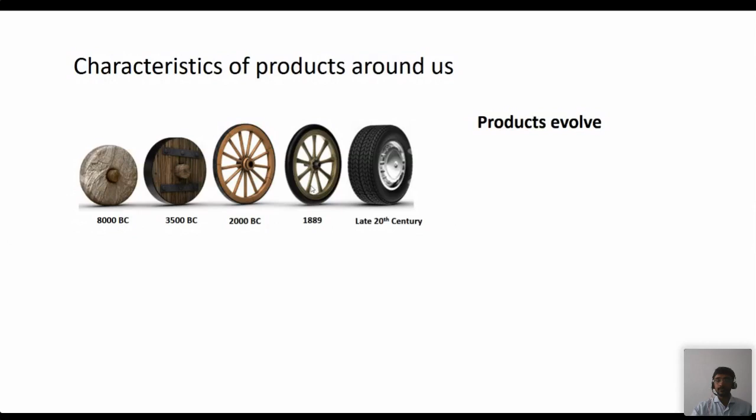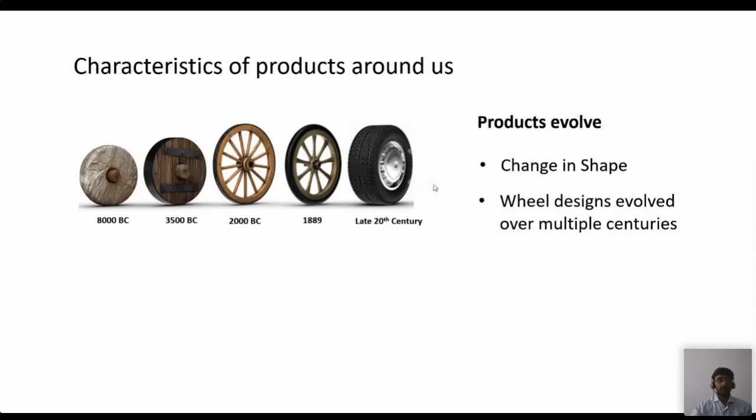And of course, the 20th century tires are much more sophisticated, with different kinds of rims and different kinds of performance tires and whatnot. So what we see is products evolve, they change shape from its initial configuration to another. The wheel designs evolved over multiple centuries, not over a few days or months or even few years.

On the contrast, I took another example of product evolution where we have cell phones. Cell phones started roughly around 1990s, and it has since then evolved a huge way now. I haven't put in some recent designs, but almost till 2015 we had a very strong evolution of cell phones itself.

On the one hand, a mechanical component like a wheel took more than 10,000 years to evolve into certain forms and achieve the form it has today, whereas a cell phone, which was a pretty recently invented piece of gadget, evolved quite fast. In the span of 20-25 years, it has evolved into multiple form factors and also in terms of functionality, with multiple functionalities added.

If we think of the initial cell phone or mobile phone, it was primarily for communication purpose, nothing more than that. And it evolved a bit to accommodate also text messages. That was itself an evolution of the function of the cell phone, which further evolved into touchscreen and smartphones.

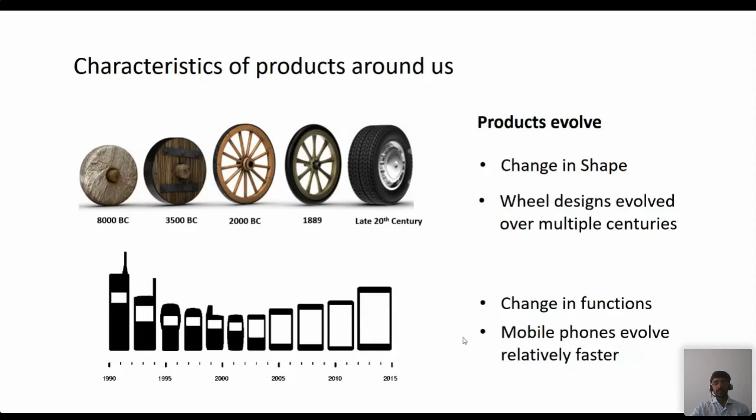So why do products evolve? This is a fundamental question we should ask ourselves. Why can't the product remain the way it is? Because the reason why the product exists is that it solves a problem for someone. And as long as it solves the problem, why does it need to evolve?

Well, it turns out evolution is part of the requirements. The requirements of what the particular product should do also evolve with time. People start changing their requirements, needs, or expectations from the product. People at the start of the product evolution cycle just think about its core functionality.

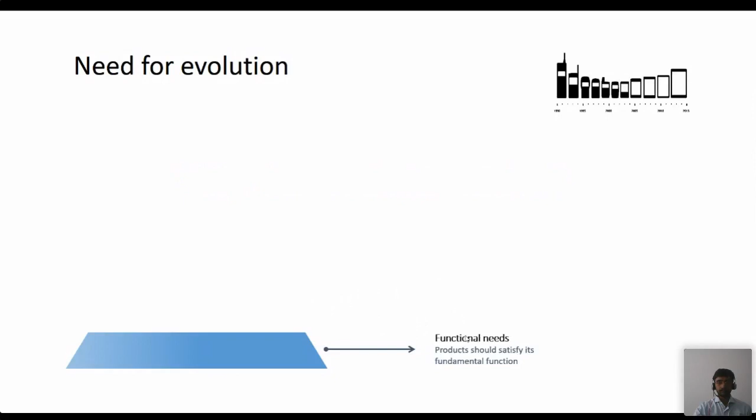For instance, in case of mobile phones, just talk to people. The next step, people say, well, now I can talk with people. Now how safe is it? How reliable is my phone? Can I take it everywhere? Is the voice secured enough between just two people? Or can someone else also hear this conversation? Such kinds of requirements pop in next, so the product has to evolve to satisfy these needs also.

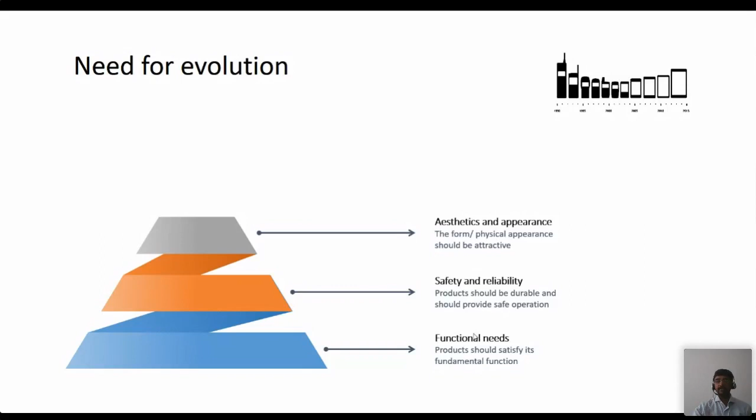It evolves further. People think of aesthetics now. So it's not just about the function, but also the look and feel of the product. How good is my product? Am I happy with it? Am I proud to have owned this product? Such kinds of attributes come next.

And last but not least, the performance, not just the core functionality. People start looking for value additions like a camera in a cell phone, or the possibility to transfer data by a certain technology, or the wireless technology supported by the device, the speed at which the device can process stuff. I want to play games, I want to do virtual reality stuff. So is my device capable enough, or performant enough for that? Such requirements also pop in, and all these requirements step by step push the product to evolve and reach the stage we see here.

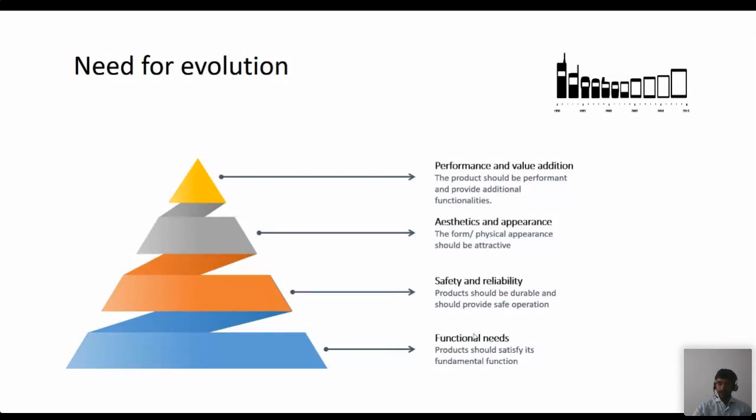But why do certain products evolve faster than others? Cell phones evolved in a span of 2 to 3 decades, whereas a wheel had to wait 10,000 years to get into the more or less complete form we see today.

To understand why, we have to look into the design process itself. How was the wheel designed, who designed it, or how the design itself evolved as a process. In early days, in case of the wheel, the evolution was more or less a natural evolution process. Someone came up with an idea someday and made a form, and it stayed like that for years or centuries together, till someone else came up with a different idea saying, 'I will make these modifications and now I can use it for such and such function.'

So these sporadic ideas here and there, which popped up over years, is what made the product evolve. There was no real standard process or procedure or design schema for the product to evolve. This made product evolution really, really slow - it was more or less an accident.

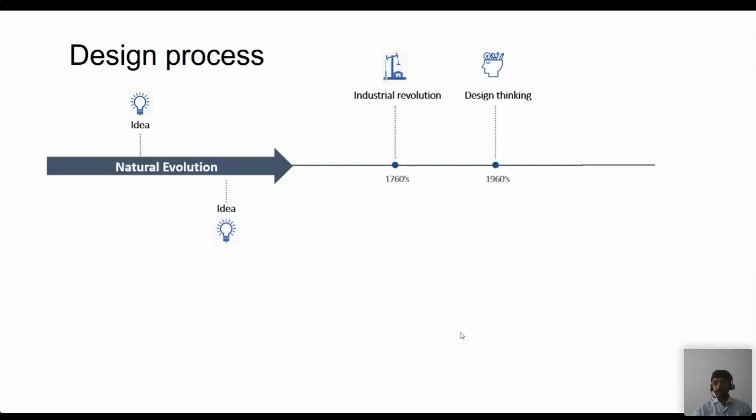This made huge leaps in terms of new designs and more robust designs, because now anybody with an idea has a structure to work on, and they can push or validate their product designs by sticking to this design process, which eventually evolved and took the form we call the conventional design process today.

Once a detailed design is there, people start creating prototypes, mock-ups, proof of concepts, and these prototypes are tested. The successful prototypes move forward, while the failed prototypes go back to the drawing table—they are redesigned, reworked, new prototypes are born, and then tested again.

This process continues until a satisfactory product satisfying the shape constraints and the function it has to satisfy is achieved, and then it's released. Of course, even after release, based on inputs from customers or users, the cycle repeats again, starting from concept, detailed design, prototype, and testing.

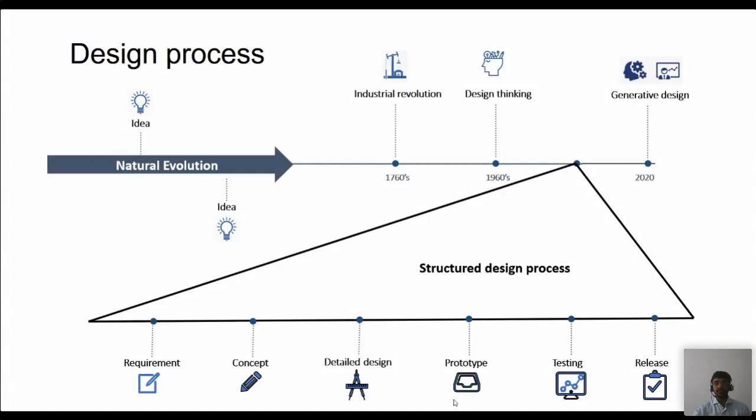Of course, in 2020, we are no longer adhering ourselves to these structured or conventional design processes. Rather, we are thinking about generative design—I'll talk about it in a later slide. We won't go into detail now, but it's a completely different paradigm, the way in which the design itself orchestrates itself.

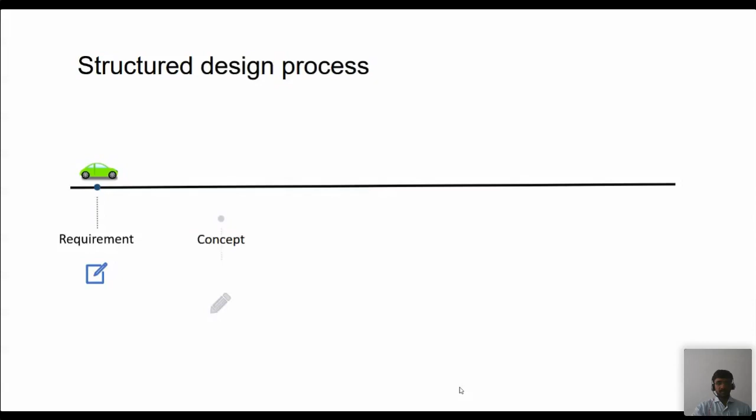A structured design process would start, as I said, from a requirement stage, then move to a concept stage. A concept stage is when people are not looking for real details—they just know roughly: okay, this is my function, this is my space constraint, and what should it do?

For instance, let's say a car. How do I define the function of a car? It has to transport people from one place to another. There's no form requirement as such. People might say, well, I need to transport 4 people at a time, and to drive the car it should be intuitive enough—it shouldn't be like driving an aircraft or something, it shouldn't be so complicated, and safety should be ensured.

And in driving, there should be reliability—that if I want to travel from place A to place B at any given point, I should be able to do it without having to think whether the device would work today or not. These are very fundamental functions people have in mind at the early concept stage of the product—a very early stage of the design process.

In a detailed design process, you can't just work with concepts—you have to put in very detailed designs which actually work. This is when people start thinking.

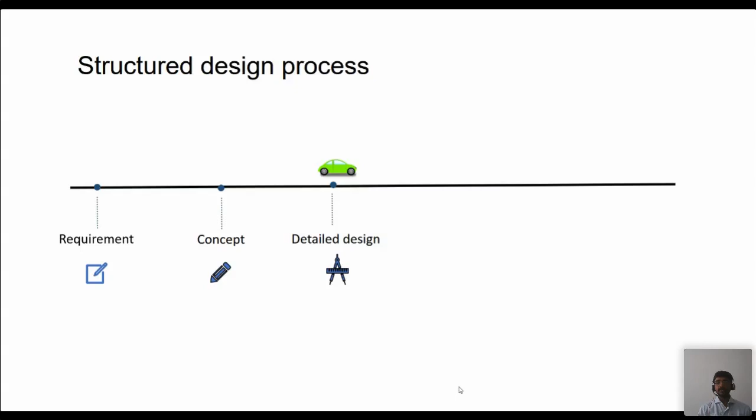Moving further, now comes the fun part: making prototypes. So you have the detailed design on paper, or on your computer. Now you want to make prototypes, so you go into the real world. You make mock-ups—these mock-ups may not have the real material, or may not be used by real customers. Rather, it's just a proof of concept to see which of the detailed designs actually work and which fail.

This is an interesting step, because moving from an on-paper design to a prototype is not a trivial task. At the prototype stage, you'd have very limited resources in terms of materials and manufacturing facilities, because the product itself is not proven. Without a proven product, nobody would invest in a manufacturing facility. So basically, people try to find materials and resources as they find fit, and try to create a proof of concept.

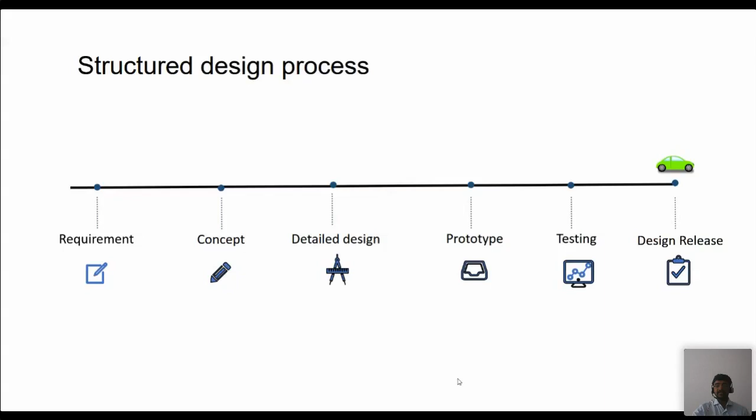Then finally comes the design release phase. That's the phase where your product sees the real world, and gets tested by real users.

In the product design process, we can split it into two parts. One, the concept design stage, is more to do with the form of the product - how it looks, the shape of the product, how the space of the product is, and so on - which is mostly done in a conventional design process using design drawings.

Most engineering students, irrespective of their department or field of specialization, would have taken this course, engineering drawing. That's pretty much what people used to do, at least in a conventional design process - take a piece of paper, use pencils with complicated compass arrangements to come up with these designs.

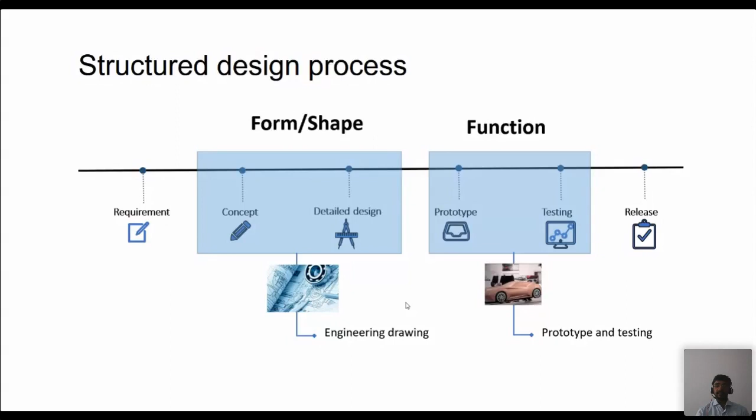Then the function part, where prototypes are built with materials, and also the testing - you have to design the tests, and also put your prototype to test. So on a very fundamental level, we can categorize the design process into two main aspects: creating the shape or form of the product, and designing the function of the product.

With the advent of computers, this cumbersome process of using engineering drawing - all of us know how difficult it is to get the lines correct, to get the measurements correct, and to imagine a 3D object in 2D. I'm pretty sure not all of us got 100 out of 100, or full marks, in engineering drawing. All of us are reasonably good engineers, but still we do make mistakes.

We make mistakes on very simple solids like a prism, or very simple primitive solid shapes, because it's not very intuitive, or it's a bit of a difficult task to imagine a 3D object and its 2D projections in different planes, and representing them in engineering drawing.

Because of the inherent nature of this technique, there are a lot of human errors involved, and this could lead to wrong products being designed, and also a lot of frustration because you have to redesign the product and don't realize it in the early concept stage, rather much later.

A concept designer would have something in his mind, but a detailed designer would understand it in a different way. A prototype engineer or a test engineer would understand it in a completely different way. So to align all these people together was very difficult.

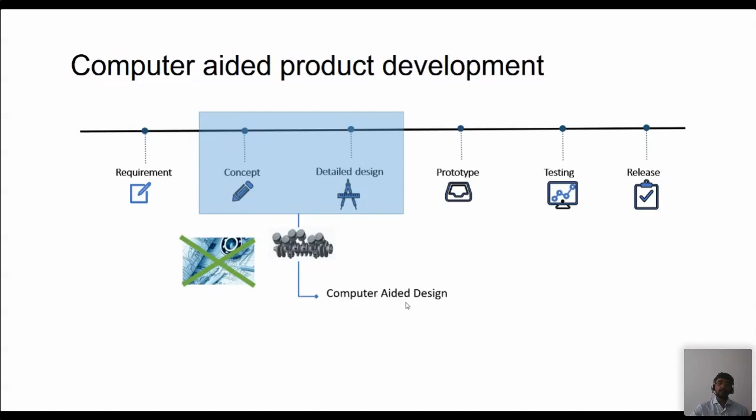A similar thing also applies to prototype and testing, because prototypes are a tricky business. We don't get the manufacturing facility upfront, so we have to work with the material and resource we have at that given point in time. So it's a very hard and sometimes very costly process. Imagine a complete car, or even an aircraft.

If you were to do a prototype of a complete aircraft and test it, first you have to design the test which is safe enough without harming people involved. Even if you manage to do that, if the product fails, imagine the amount of cost incurred in the failed concept. For such a complicated system like an aircraft, or even a complete high-speed train, it takes so many iterations, and each prototype would cost millions. This would literally make the complete product non-viable to bring into market.

To avoid such problems, computer aided technology revolutionized the whole process. We have something called computer aided engineering, or I call it engineering simulation, because engineering can be many more things than just engineering simulation. So the general terminology is computer aided engineering - CAD and CAE, we call it. These two digitalization technologies of the design process completely changed how we think about product design.

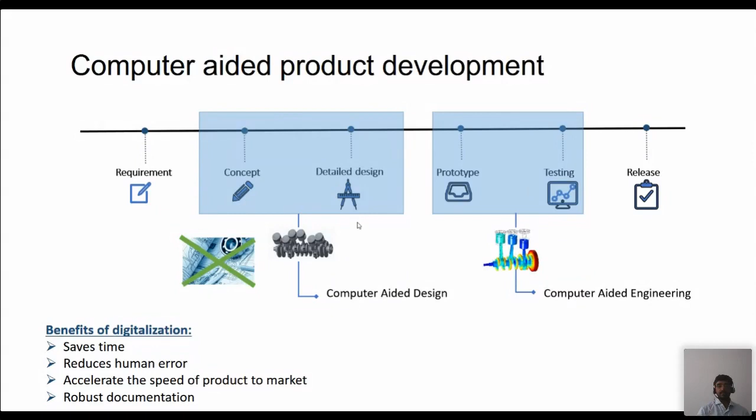A typical engineering simulation - now I move into the second part of my presentation, where I dive a bit deeper into engineering simulation itself. Engineering simulation is a process of predicting how a particular product would perform or function in reality without having to really model it in real life, like making a prototype. You digitally model the component or complete product and simulate it based on the underlying physics principles involved in the design, and try to predict whether or not the product would be successful, and under what conditions, to get more insight into the product without getting our hands dirty. A typical engineering simulation process starts with the physical system, concept design in this case.

Then we build a detailed 3D model of it, or even a logical model sometimes would help. A logical model would be like a representation of a spring and a damper, for instance. You don't have to really model the detailed definition of springs and dampers, but you just have a notion of spring and damper - you logically represent these two aspects in simulation.

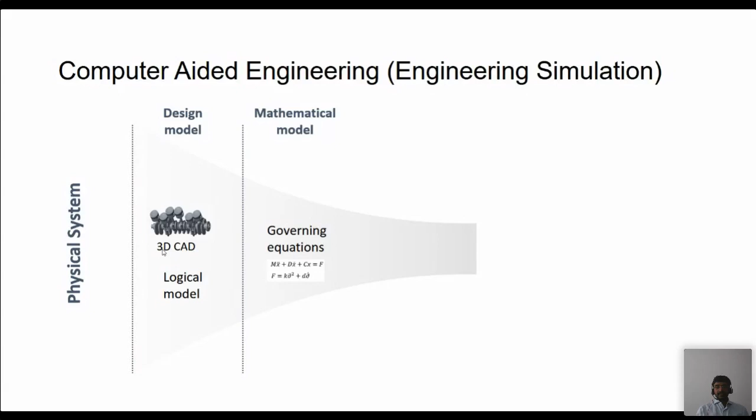The most important step is to derive the mathematical model, which describes the function of the system. A mathematical model is nothing but the governing equations or the physics which governs the functioning of this body. For instance, it could be simple physics from Newton's second law, or equations of motion, or it could be very complicated physics like fluid dynamics - flow of fluid within a tube - or complete weather prediction physics, or any kind of complicated physics. All these physics are at the end represented by a set of governing equations or mathematical equations. These equations describe the function of the object.

The next step would be to use these equations to solve the underlying physics problem. You would ideally have algorithms which work on these equations, and these algorithms are embedded in simulation softwares, and the equations are built into these softwares as well. So what you would ideally have in the real world is a CAD representation of the real system, and this would be given to the simulation software, and the simulation software, with whatever technique it uses, creates the fundamental physics equations which are relevant for this physical system, and these equations are solved using special algorithms tailor-made to solve them.

Once we solve the physics behind it, we have a reasonable prediction of how the system would behave. For an engine, for instance, whether it would work as we expect, whether it will provide sufficient power, whether it will be durable, whether the parts will break or not. Such predictions can be made with simulation by solving just the fundamental equations underlying and describing the physics.

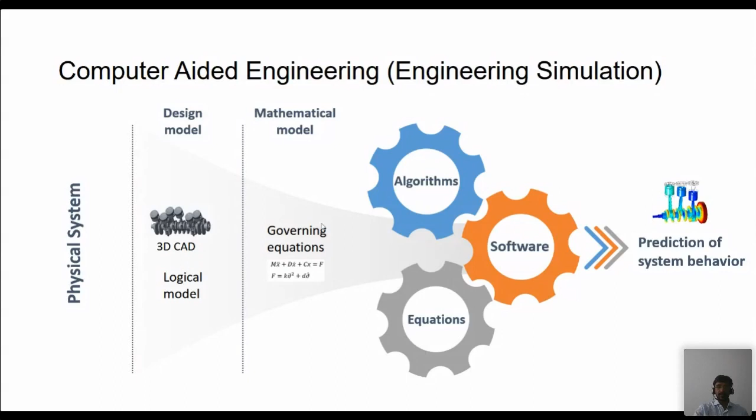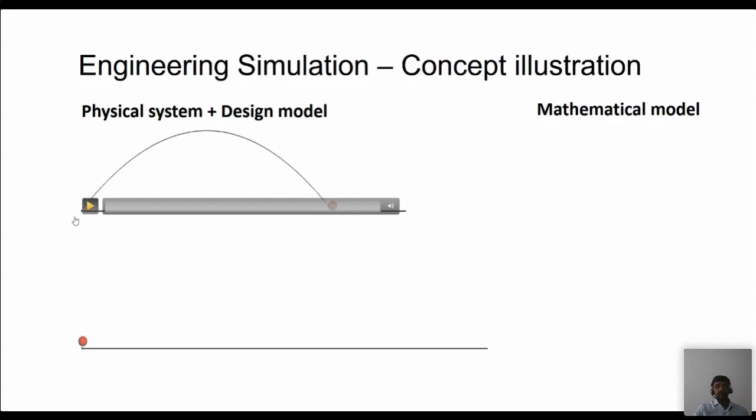So moving on, this is just a concept illustration of what I mean by simulation. You see this ball moving, just a ball with initial velocity, taking a trajectory under gravity and landing somewhere else. Most of us would have studied in school physics how to model this, how a mathematical model of it looks like. It's simple 2D equations of motion from fundamental Newtonian physics.

Let me make the problem a little more complicated now. So the ball doesn't just start and end at a point, but it bounces, and bounces again. There is a contact with the ground, and you can see it bounces, but after the bounce it doesn't have the same amount of energy for the next leap. So it travels less distance and also less height.

Interesting. So how do I capture this physics? I add a few more complications, or a little more sophistication - we can also call it detail - in terms of equations of motion or the mathematical model. So this mathematical model now describes this phenomena, not just a ball being thrown from one side and landing on the other side, but bouncing and doing something.

Let's make it even more interesting. Let's look at it in 3D. So how would it look like? Now we are not just dealing with two-dimensional space, but a three-dimensional space where the ball can move not only in the longitudinal direction, but also in the lateral direction. And also the ball can turn - it can rotate as it moves.

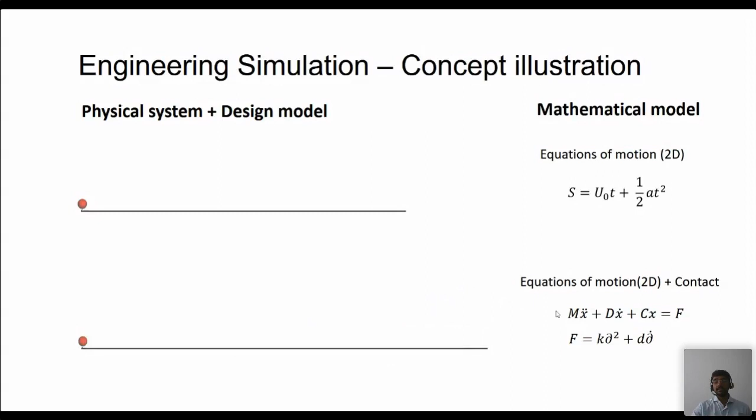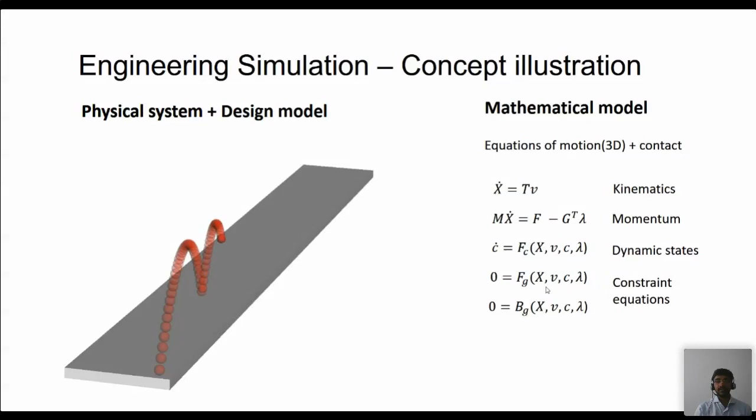But maybe my requirement is to see how much the ball bounces after the first contact or subsequent contact, or when the ball will stop. Then probably I should consider this level of detail. If I want to really consider how it's positioned not just in the longitudinal direction but also in the lateral direction, then I have to consider these equations.

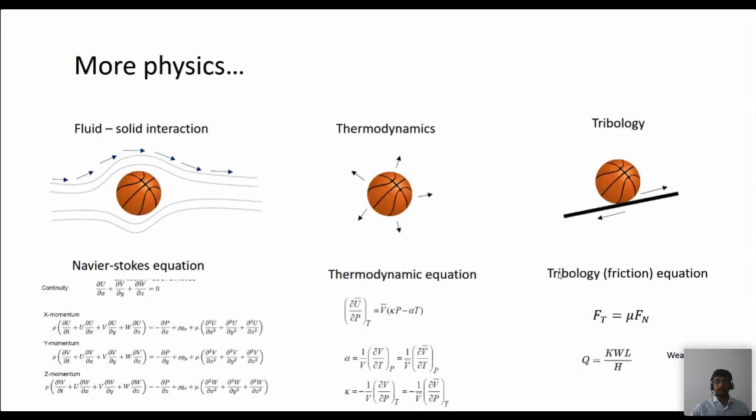But if I really want to go into detail of how the ball turns or twists from the perspective of the ball itself, rather than from the perspective of the global system, then I have to consider all these equations. So depending upon what the purpose is, we have different simulation domains.

So the underlying governing equations are classified into certain domains of simulation, which solve certain sets of equations. For instance, multi-body dynamics assumes the body, or any object, to be rigid and doesn't consider any elasticity. All we're interested in with multi-body dynamics is the overall system characteristics of the complete system. For instance, with this ball, I'm just interested in how the ball moves, not in how it deforms after its first contact or impact on the ground.

Structural simulation, on the other hand, says I'm interested in a little more. I can't assume the ball to be rigid; I want to really consider the flexibility of the ball. Then you have to consider a more detailed analysis, let's say finite element analysis. That's structural simulation, where the elasticity of the body is considered.

There are also other kinds of simulations. Electromagnetic simulation - for instance, our cell phones, whether the electromagnetics and electrical circuits within them work properly. To simulate that we have different sets of mathematical equations categorized under electromagnetics. Similar things apply to thermodynamics and fluid mechanics, if you're looking at fluid interactions, fluid-structure interactions, or just pure fluid interactions like a mixture of liquid and air.

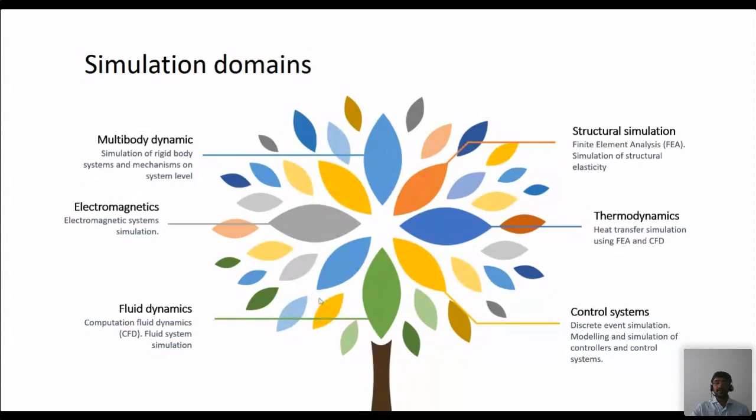Control systems - there are always control systems in any modern system. A cell phone, a car, everything has electrical control systems which control different actions or electrical circuits. These are separate sets of equations. So the simulation domain basically splits all these equations into different domains, and each of these can be used together. Depending on the level of detail we want, we choose one or more of these. That's the idea, and that's why we have simulation domains.

Some industrial applications - so enough talking, let's look into some industrial applications. I'll play some video.

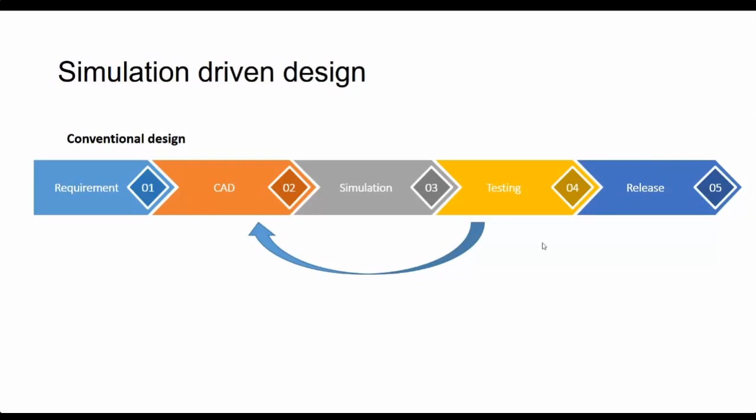I will switch back to my slides here. There's one more interesting aspect of simulation - how things are evolving. The conventional design process, as I explained before, is CAD, followed by simulation, then testing. So simulation tries to replace testing mostly, but there is still some testing required for design approvals, followed by the release.

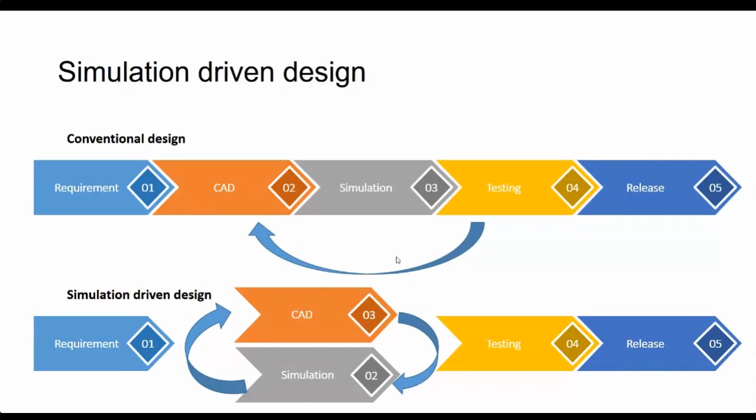But then there is a new paradigm shift, which is current - simulation-driven design. So you don't put simulation after CAD, rather CAD and simulation go hand in hand. The iteration loop is much faster, and you come to a realistic solution much more quickly compared to the conventional design process. There is also a demonstration of that - I will just show that.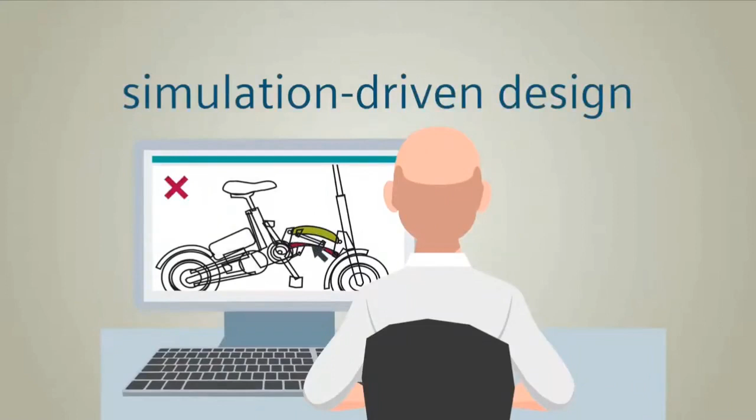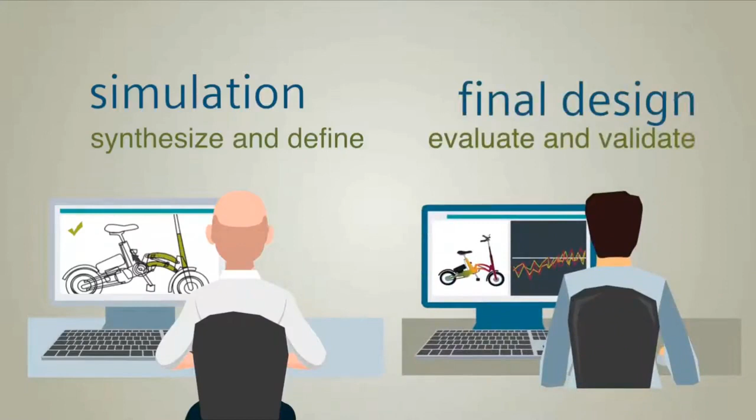Your design team faces an impossible task every day. How do they create new designs that won't fail without information on how they will perform? Simulation experts can help, but their feedback often comes too late. As a designer, wouldn't it be great to know how a design performs as you are designing it? The age of simulation-driven design is here. We are now in an era where simulation is being used to synthesize and define the physical design, rather than simply to evaluate and validate final designs. Imagine getting immediate feedback on the performance of your part as you are designing it. Realize how much better your design could be and how much faster you could deliver it. Think of how you could confidently turn around a customer's engineering requirements faster than your competition and win more business. Envision the ability to create lighter, radically new design concepts with full confidence that they will exceed performance targets. Innovative manufacturers are taking advantage of advances in simulation technology and development processes from Siemens PLM software to beat their competitors to market with higher quality, longer-lasting products. Come visit Siemens PLM software to learn more about the new age of simulation.

That was another demonstration of how the industry is evolving in terms of product design and simulation driven designs. So I'll switch back to my presentation, the last slide now.

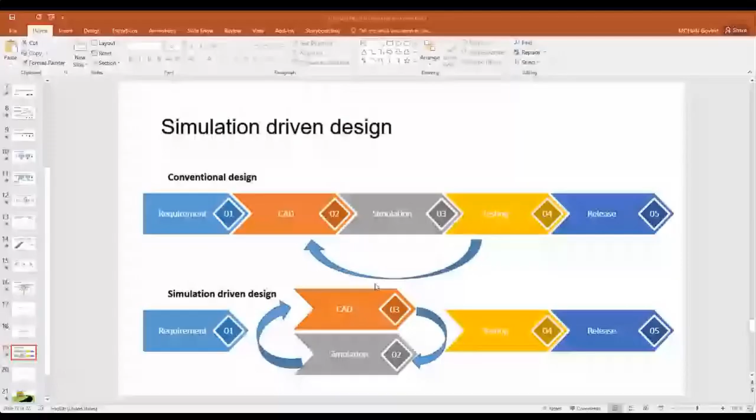The career options. Simulation is cool, we can do a lot of things, but what can a student do? There are, as I see it, three options.

Sorry, can you hear me? Yes sir, we can able to hear you sir. Okay good.

So again, the career options. We have, as I see it, three options. You can be an academic researcher, a simulation academic researcher, who would typically work on the physics equations - taking a realistic physical system and representing it in terms of equations.

A software developer, who is in between the user and the researcher, takes these equations, converts them, finds algorithms to solve these equations, and creates software programs which can actually solve these problems and present the results to the end user.

The third career option is application engineer. Application engineer actually uses these softwares to solve real world problems. So he is the one about whom I have presented for most part of my slides. That's basically the third option of the career.

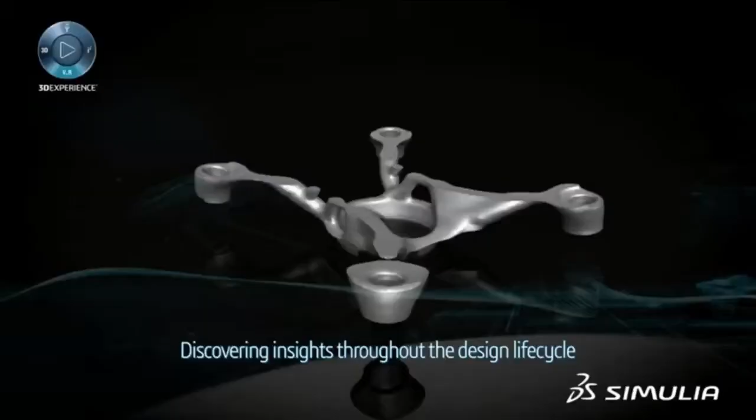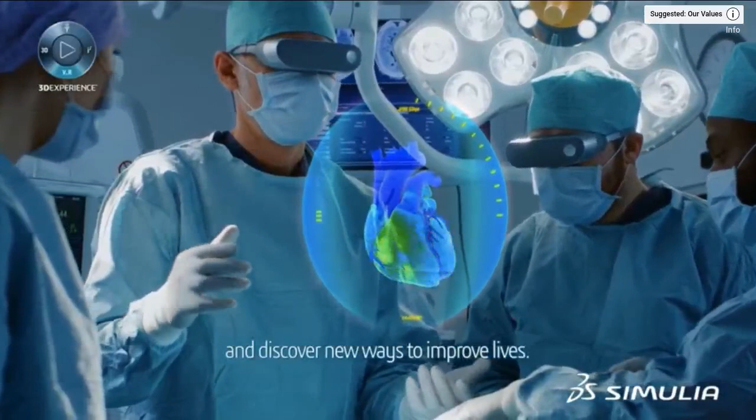Behind every good product, there's a great story. Some of the chapters are obvious, but many are hidden. These are the unseen forces that can mean the difference between failure and success, and often they can't be understood by traditional methods. That's where we come in. Digital simulation allows us to perform comprehensive tests in a virtual world, discovering insights throughout the design lifecycle, so you can develop the perfect parts, assemble them into something completely new, and discover new ways to improve lives, all before a single product gets built. In this way, we can mitigate risks, enhance innovation, and change the world together. This is our passion, our legacy, our story. Simulia - reveal the world we live in.

Yes, Mr. Govind. Can you hear my voice? Sorry, yeah, I was muted. So that was my last video, last presentation slide also.

Thanks for the opportunity. Thanks for listening in, and I hope I have shared some useful information.

Mr. Govind, really the session was more informative. I hope everyone has learned something, and you have given clear insights about Simulia and what we think about simulation and what it's going to be used for. But you have thought about beyond what we think, and it's really useful for us. With this, we have a few questionnaires also, and I'll go into the questions.